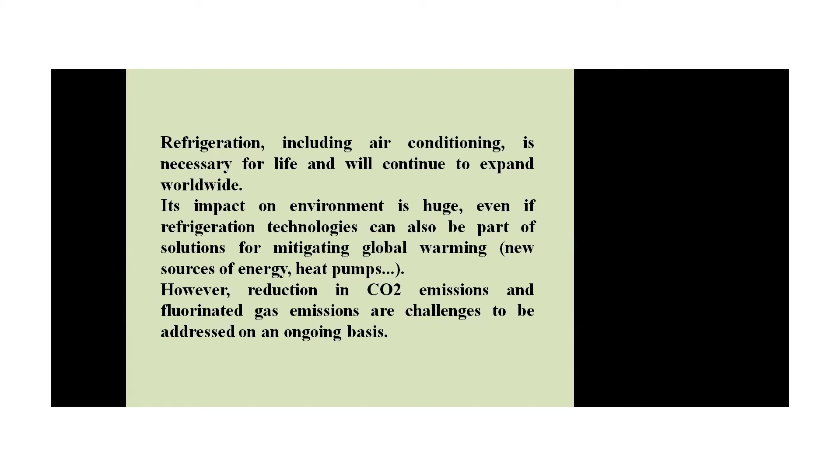Now, refrigeration is necessary for mankind, as temperature is a magnitude and a key variable in physics, chemistry, and biology, and characterizes the states of matter - liquids, solids, gaseous phase - which is vital for all living beings. And thanks to our research and development for almost 200 years, refrigeration technologies have progressively led to the providing of good and vital services to mankind.

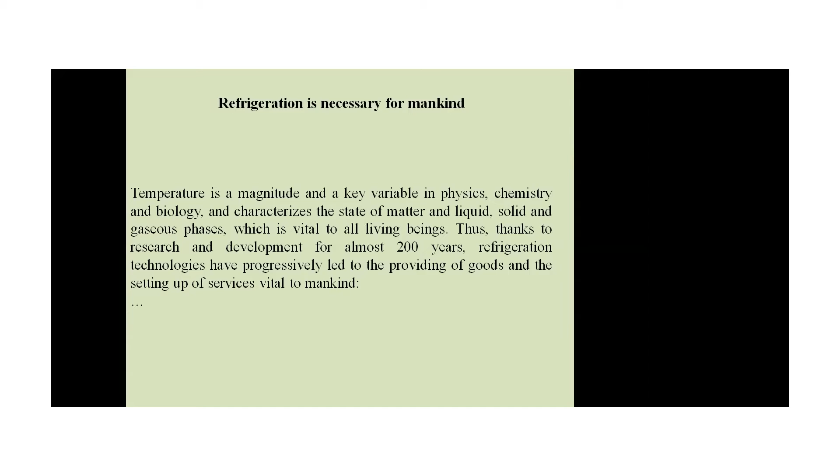Cryogenics means the sectors where we are using refrigeration: air separation for medical uses, cryosurgery, anesthesia, petrochemical refining, steel production, space propulsion, fuels, medical applications, transport and distribution of natural gases or hydrogen, manufacturing of semiconductors, sequestration of carbon dioxide, conservation of species, etc.

Other major health issues where refrigeration plays an important role are the preservation of cells, tissues, organs, embryos, surgery and operating theaters, and manufacturing and transport of drugs and vaccines.

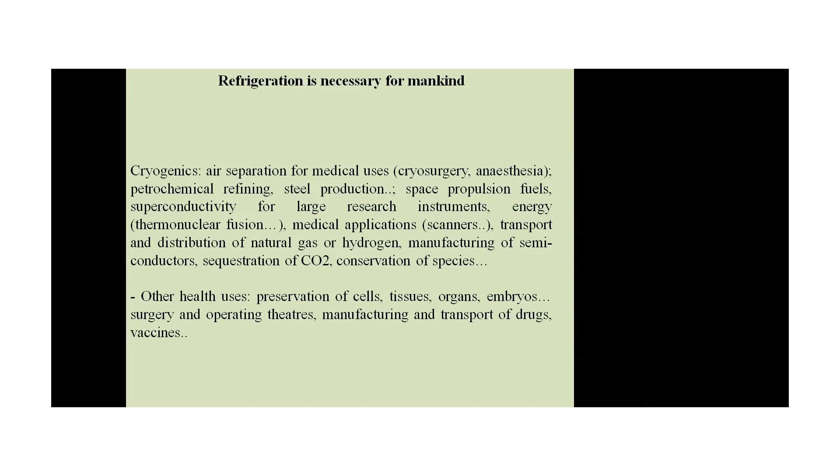Without transportation, the economy of a nation cannot grow, so in the transport sector refrigeration also plays an important role. Take for example air conditioning, vehicles, living areas, integrated systems, heating and cooling with heat pumps, offices and factories, particularly in hot climates, but also technologies like electronic components, computer technology, data centers, and biotechnology.

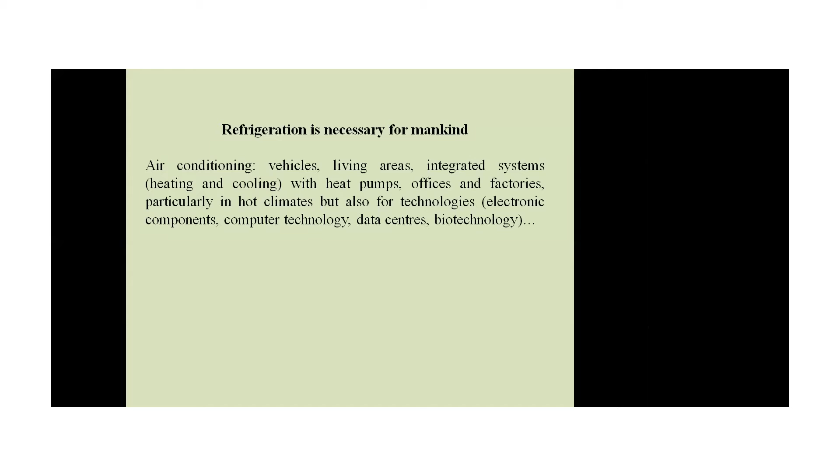Many of the programs have been going on online, so most of these devices and systems are being placed in areas where air conditioning is available, so that these systems can work at the greatest efficiency.

As far as food is concerned, the basic need of human nature is food, clothing, and shelter - in Hindi we call it roti, kapda, and makan. So food is also an important sector where refrigeration plays an important role.

In food, refrigeration is used in manufacturing, texturation, formulation, freeze-drying, fermentation, concentration, and separation. Storage and transport - for example, we are supplying milk from one place to another - and for commercialization purposes we are also using it.

Domestic refrigerators are the refrigerators that we use at our home to prevent food from spoiling.

As far as energy and environment applications are concerned: cryopreservation of genetic resources, capture and underground storage of carbon dioxide, heat pumps, and new energies.

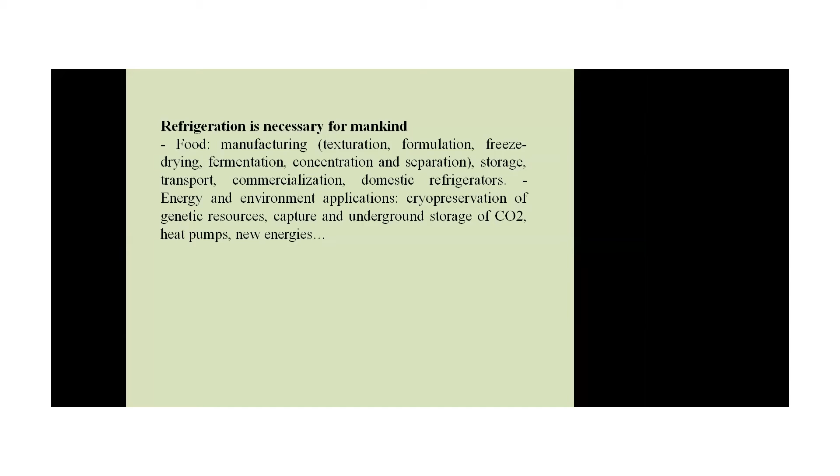As far as the impact of refrigeration and air conditioning on the environment is concerned, on the stratospheric ozone layer, more than 90% of refrigeration equipment relies on vapor compression using refrigerants, and that is not likely to change in the near future.

Chlorinated refrigerants, for example chlorofluorocarbons, and to a lesser extent hydrochlorofluorocarbons, contribute to the depletion of the stratospheric ozone layer if released into the atmosphere due to equipment leakage, or if refrigerants are not properly recovered when disposal of the equipment takes place.

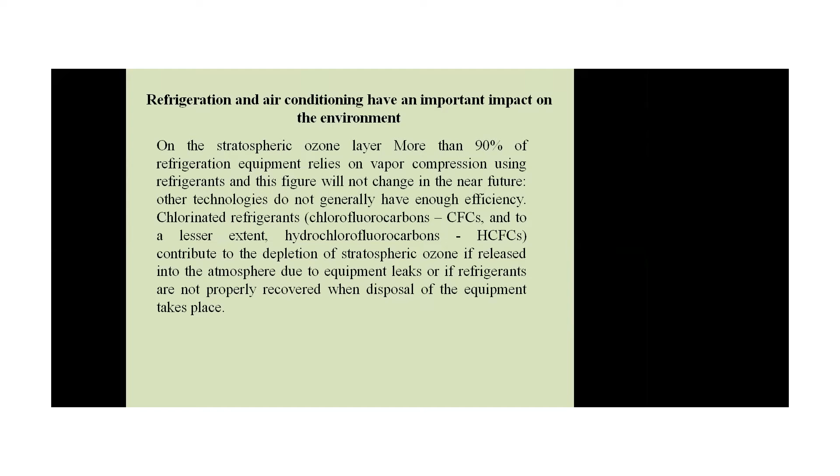So this is about leakage. If a refrigerant is released into the atmosphere, the heat generated while all these cycles are being performed is also one of the concerns in increasing global warming.

CFCs and HCFCs are gradually being phased out thanks to the Montreal Protocol. These protocols are nothing but regular meetings of all the nations, which are continuing on a regular basis.

Take for example, you might have also heard of the Kyoto Protocol, being followed since the 1990s onwards. Kyoto is a city in Japan, and protocol means the treaties and legislative documents that have been signed for the protection of the environment.

Current measures of the ozone layer show overall stability and probable recovery of previous levels around 2060. Ozone-depleting substances are often replaced by hydrofluorocarbons, which do not deplete the ozone layer but are potent greenhouse gases, as are HCFCs. When released into the atmosphere, chlorofluorocarbons were also greenhouse gases, and their global warming potential was much higher.

The impact of the Montreal Protocol is thus also positive regarding global warming. The Montreal Protocol has led to great progress in phasing out important ozone-depleting substances, including CFCs, HCFCs, halons, and a number of other chemicals containing chlorine and bromine.

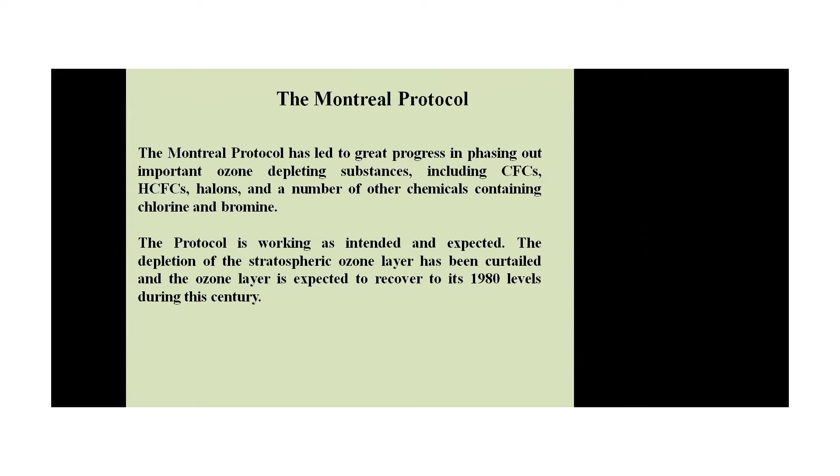The whole world is committed, as you might have heard about 2DC - the 2 degree centigrade program. We are trying to prohibit the temperature rise, stop global warming, and reduce temperatures so that the overall temperature of the earth does not increase by 2 degrees centigrade by the end of this century, because if such a thing happens, most of us will be in the biggest of troubles.

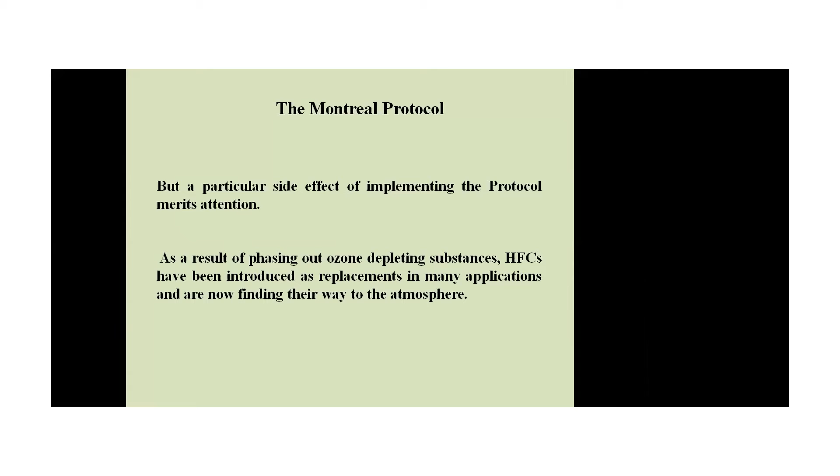The HFCs vary significantly in their ability to influence climate, whereas some have low global warming potentials of less than 20, others are potent greenhouse gases with global warming potentials of thousands to tens of thousands. Given that the global warming potential of the current mix of hydrofluorocarbons is about 1600, there is concern that HFCs will significantly influence climate in future if they continue to increase.

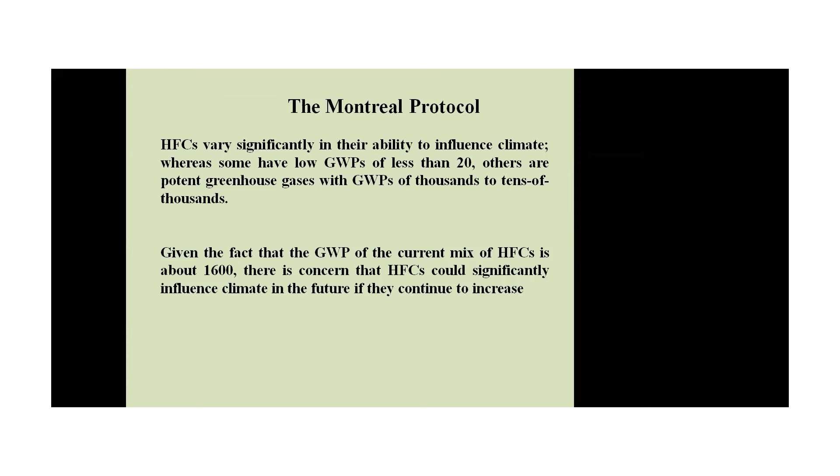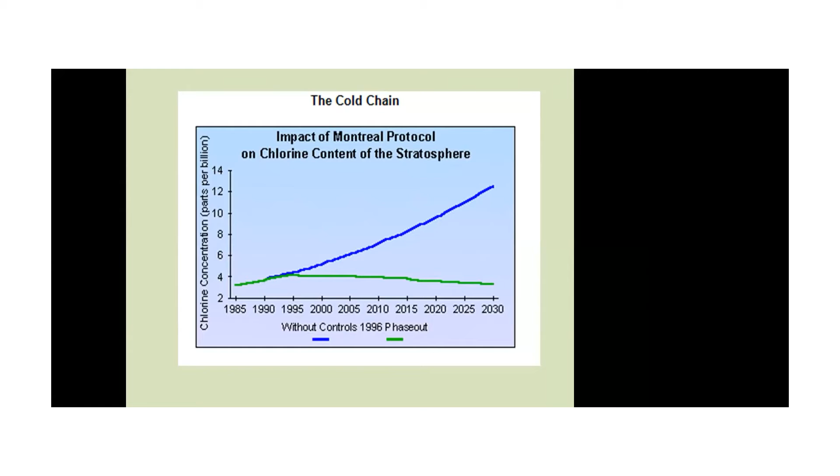So this is the graph which shows the chlorine content of the atmosphere if it just goes out of control. You can see the blue line reaching about 12 parts per billion by the end of 2030. If this particular phase out is carried out, it may be curtailed down, which will be very helpful for us.

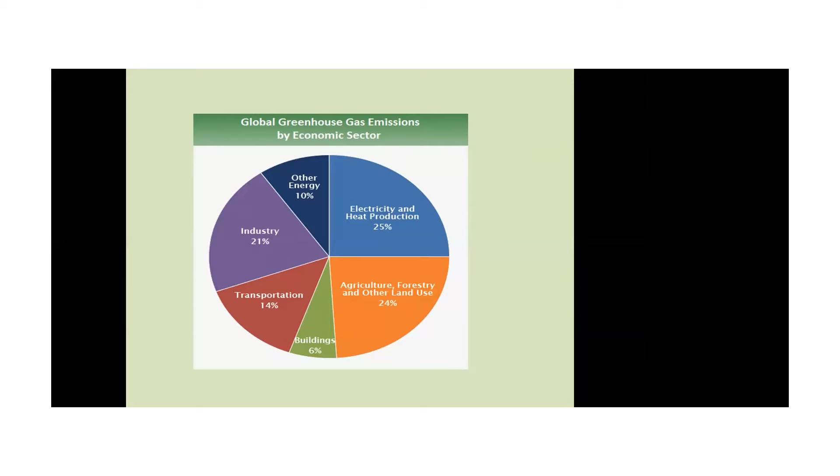Now, as far as global greenhouse gas emissions are concerned by the various economic sectors, these are the sectors that we generally relate to, and we need all these sectors for our economic growth. Take for example electricity and heat production, agriculture, forestry and other land uses, buildings, transportation, industry, and other energy. I think refrigerant plays an important role in every aspect of this particular figure being shown.

This is about the whole global status or standard. The energy used in industries is around 24.2%. This energy used in industry comprises iron and steel, chemicals and petrochemicals, food and tobacco, paper and pulp, machinery, and other industries.

As far as transport is concerned, the transport sector comprises road transport, aviation, and shipping. This almost leads to 16.2%.

Now coming to the residential sector. Residential sector means energy used in buildings, which is growing up to 17.5% in its present status. Commercially it is 6.6%, and residential purpose buildings are 10.9%.

And we have unallocated sectors remaining, that is agriculture and forestry also using energy, and these are the contributions being made by all the sectors at present.

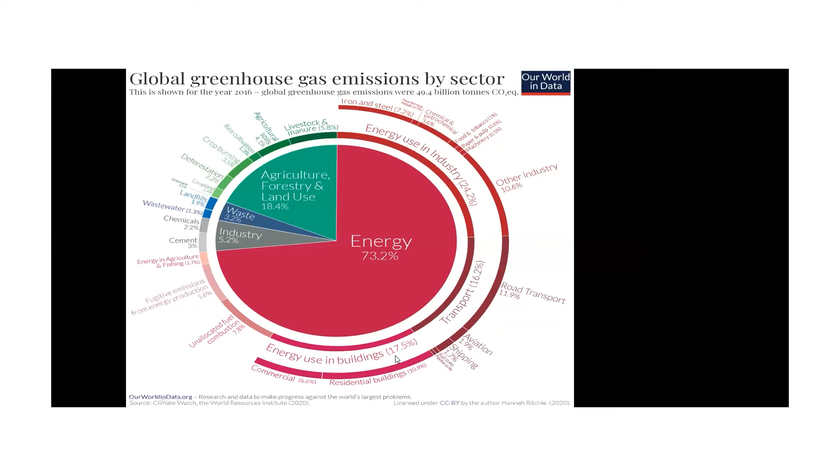So these are some direct fluorinated gas emissions. These direct emissions have been reduced considerably since 1987. However, we need to act in order to avoid a new increase, that is setup of reliable fluorinated refrigerant recovery across the world, scrapping of equipments, reducing leakage through design, proper maintenance, training, and certification of technicians and plants.

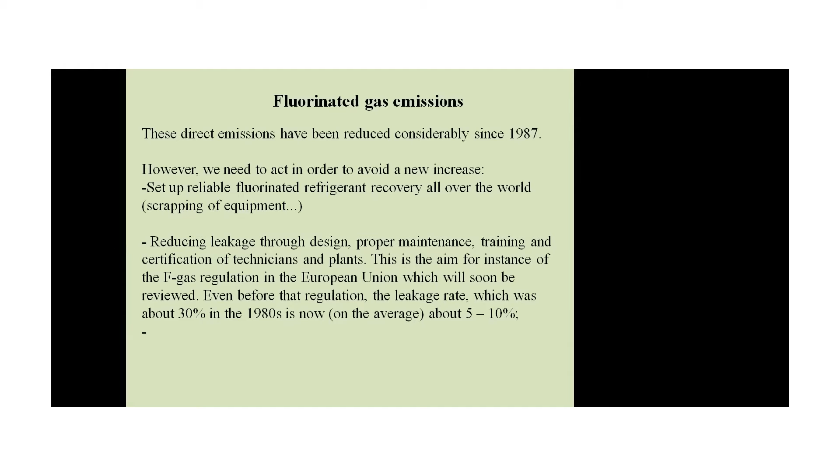This is, for instance, the F-gas fluorine gas regulation in the European Union, which will soon be reviewed. Even before the regulation, the leakage rate, which was about 30% in the 1980s, now averages about 5 to 10%.

Reducing refrigerant charge, that is secondary loops, microchannel technology, and heat exchangers, thus reduces the refrigerant emissions per refrigeration unit with the same capacity. It is also a solution which avoids safety problems when using low global warming potential refrigerants.

Promotion of low global warming potential refrigerants, especially natural refrigerants - ammonia, carbon dioxide, hydrocarbon, and water - which already enable efficient solutions to be developed for most applications. Even if technical solutions were often initially developed in developed countries and in cold climates, applications also exist in China, India, and Australia.

Taxing or banning of certain high global warming potential refrigerants in certain applications, that is mobile air conditioning regulation in Europe or taxes in certain European countries, promoting alternative solutions.

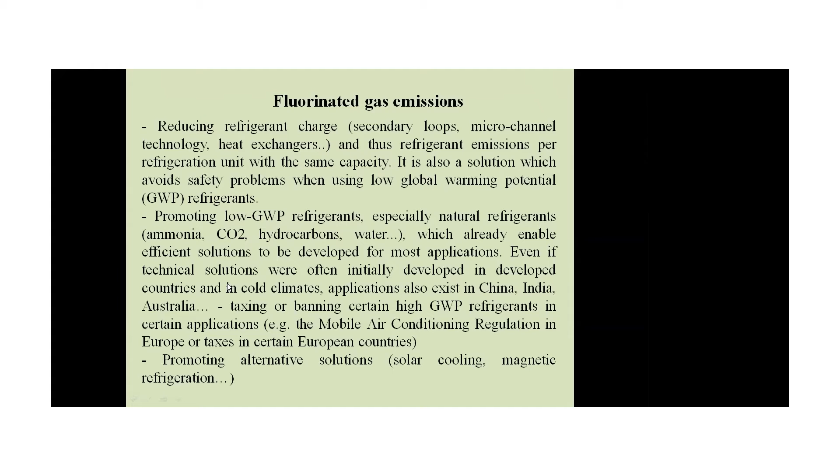As my colleagues, those who have been using four-wheelers, might have seen, every 10 years there is some change in the refrigerant. Some new technology is being incorporated, which is beneficial for us as well as for the environment.

The coefficient of performance of refrigeration systems has already been improved. For instance, in commercial refrigeration it was about 2.5 in 1960, and it is now about 4. New refrigerators used 4 times less energy in 2008.

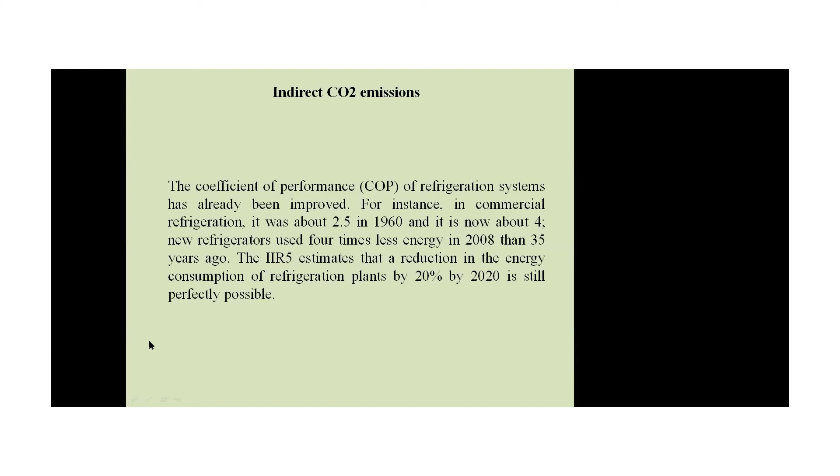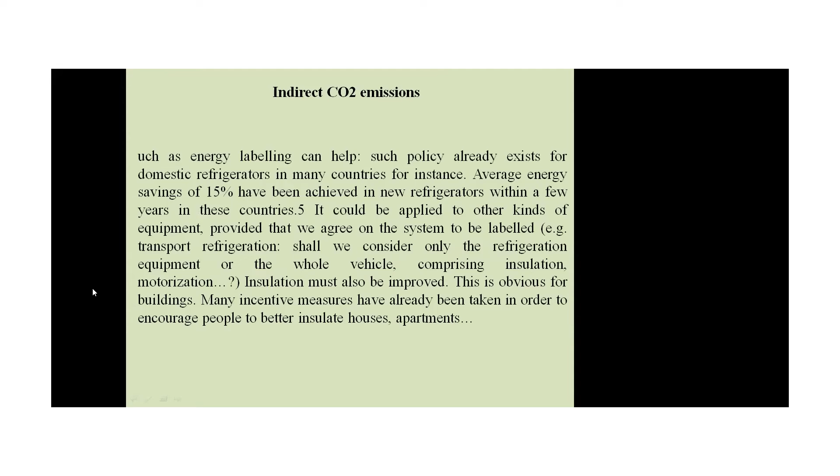These are some factors which may help us in lowering emissions. Energy labeling can help. Such policies already exist for domestic refrigerators in many countries. For instance, average energy savings of 15% have been achieved in new refrigerators.

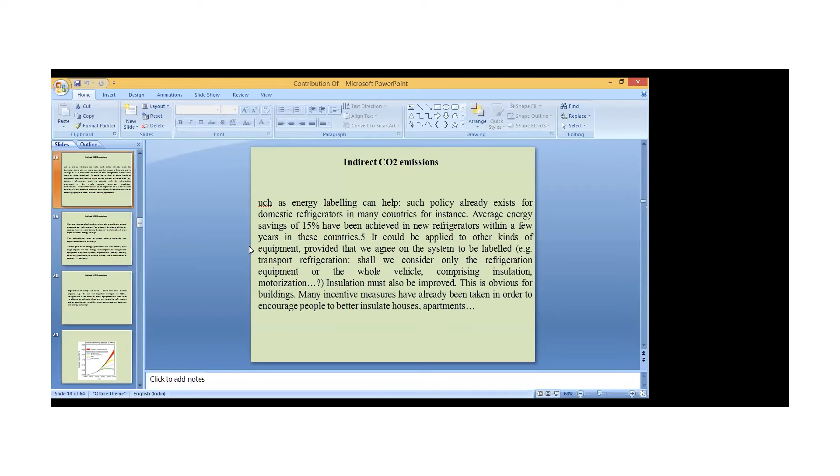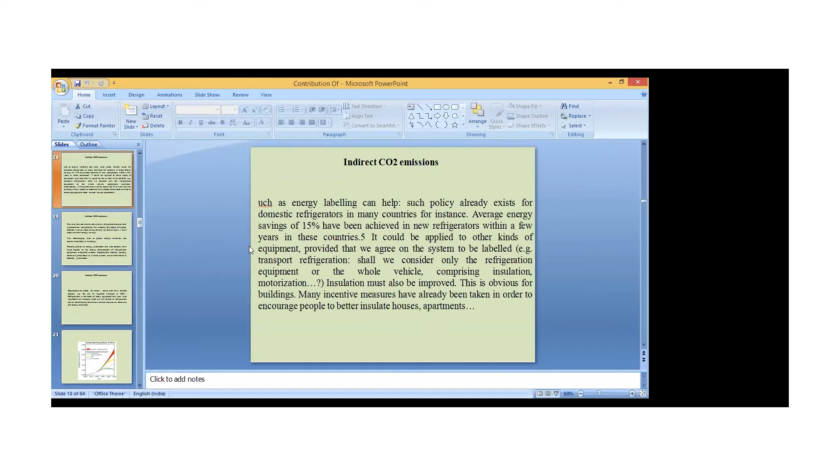Now, talking about the indirect carbon dioxide emissions - in the slide you can see transport refrigeration should be considered not only for the refrigeration equipment but the whole vehicle, comprising insulation and motorization. Insulation must also be improved. This is obvious for buildings too; many incentive measures have already been taken in order to encourage people to better insulate houses and apartments.

However, this can also be achieved in refrigerated transport and in commercial refrigeration. For instance, the design of display cabinets that are open during the day and covered at night is a major source of energy savings. New technologies such as phase change material can improve insulation in buildings.

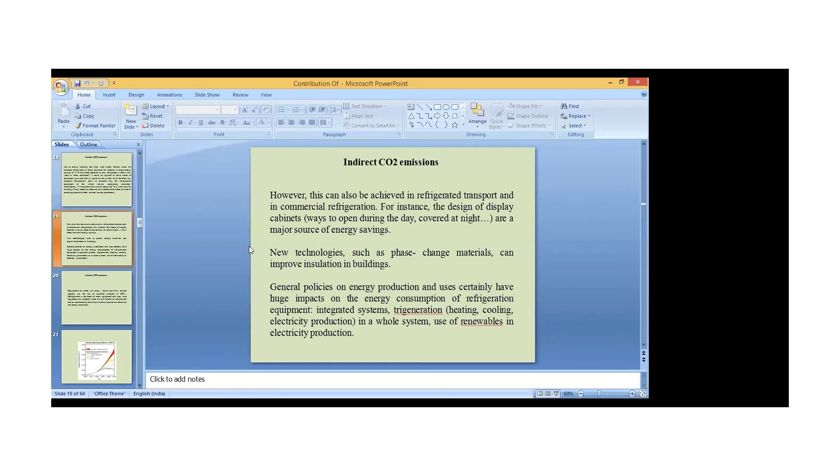General policies on energy production and use certainly have huge impacts on energy consumption of refrigeration equipment, integrated systems, trigeneration, heating, cooling, and electricity production in a whole system, and the use of renewables in electricity production. Regulations on safety or noise could also have indirect impacts. The use of liquefied nitrogen or carbon dioxide refrigeration is at the heart of many equipments, and even regulations on subjects not related to refrigeration and air conditioning could have indirect impacts on electricity and energy consumption.

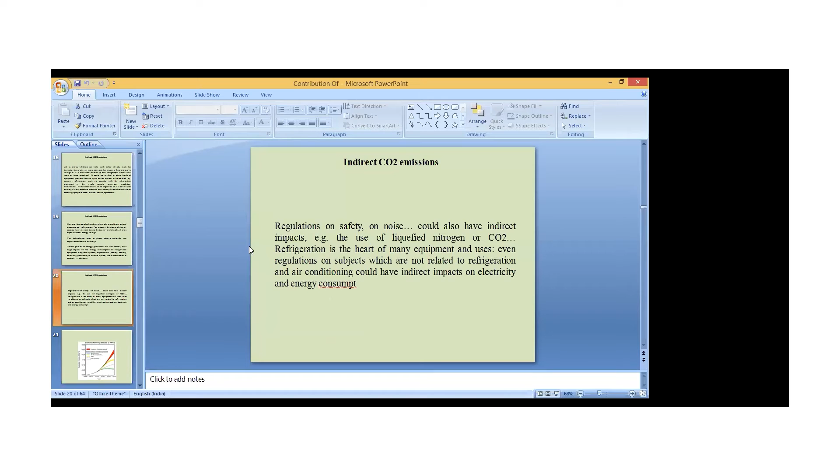So this is the climate warming effect of using hydrofluorocarbons. It means if hydrofluorocarbons have been constantly used, then this is the scenario that we are going to obtain. The baseline is the red area being shown, and per the Montreal Protocol amendment proposals, if India follows them, they will be reaching up to that standard.

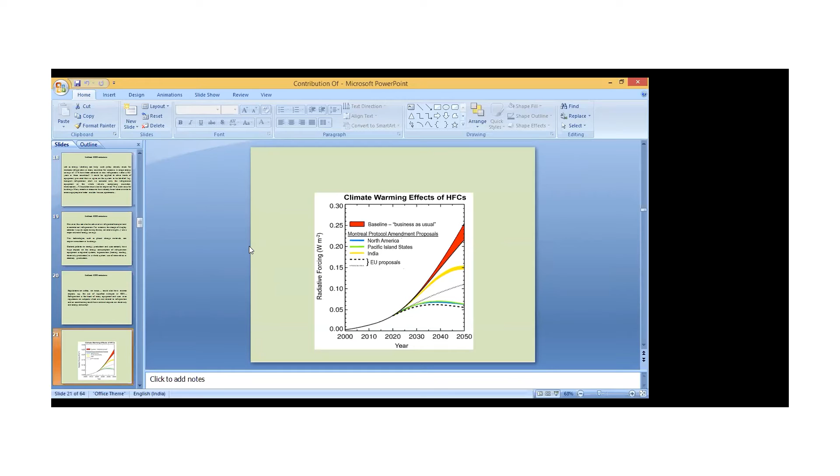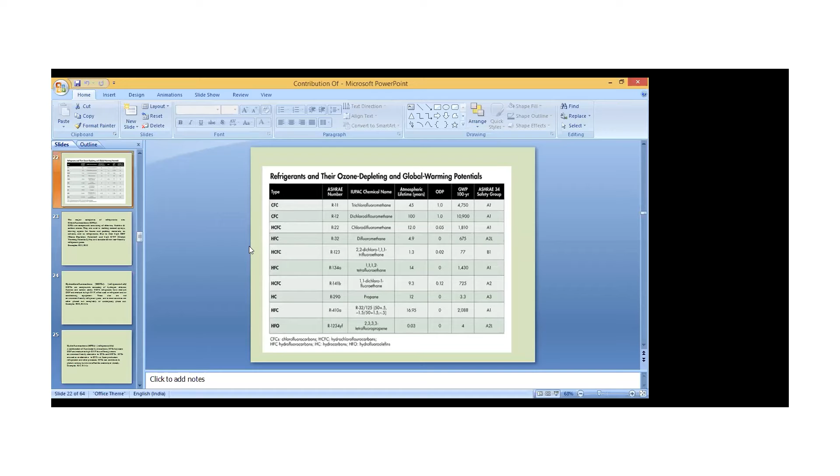So these are the various things that we are doing. Now, as far as refrigerants and their ozone depleting and global warming potential are concerned, this slide shows the chlorofluorocarbons and their numbers stated against them, along with their IUPAC chemical names. Their atmospheric lifetime in years and their global warming potential over 100 years are also mentioned in this slide. So now, the major categories of refrigerants being used, after coming so far.

Chlorofluorocarbons are compounds consisting of fluorine and carbon atoms. They are used in making aerosol sprays, blowing agents for foam and packaging materials, as solvents, and as refrigerants due to their ODP, that is ozone depletion potential, and high global warming potential. They are considered non-eco-friendly refrigerant gases. Examples cited are refrigerant 11 and 12.

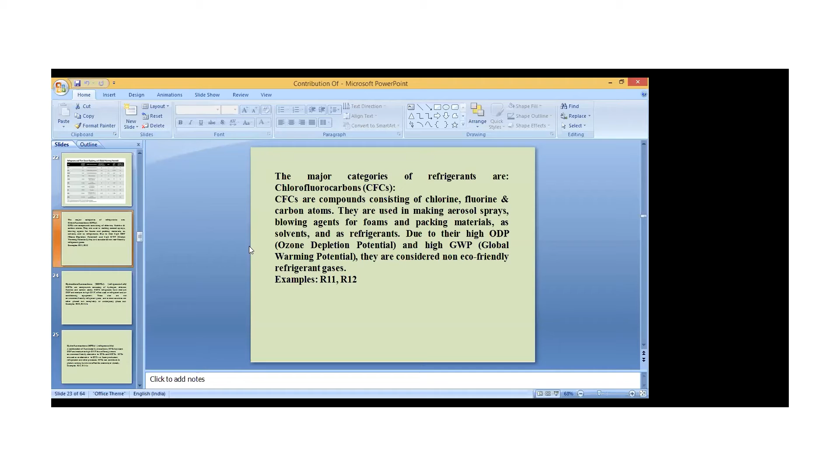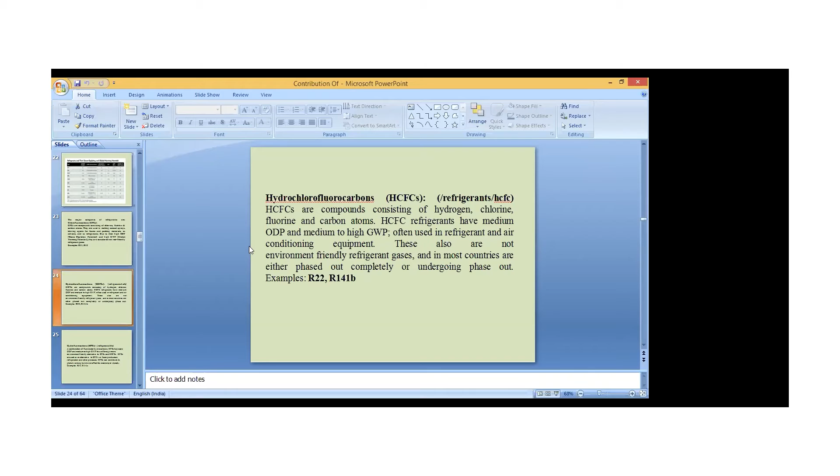This is about hydrochlorofluorocarbons. Hydrochlorofluorocarbons are compounds consisting of hydrogen, chlorine, fluorine, and carbon atoms. HCFC refrigerants have medium ozone depletion potential and medium to high global warming potential. They are often used in refrigeration and air conditioning equipment. These are also not environment-friendly refrigerant gases, and in most countries are either completely phased out or undergoing phase-out. These are the examples - the refrigerants that are being stopped or are no longer being used.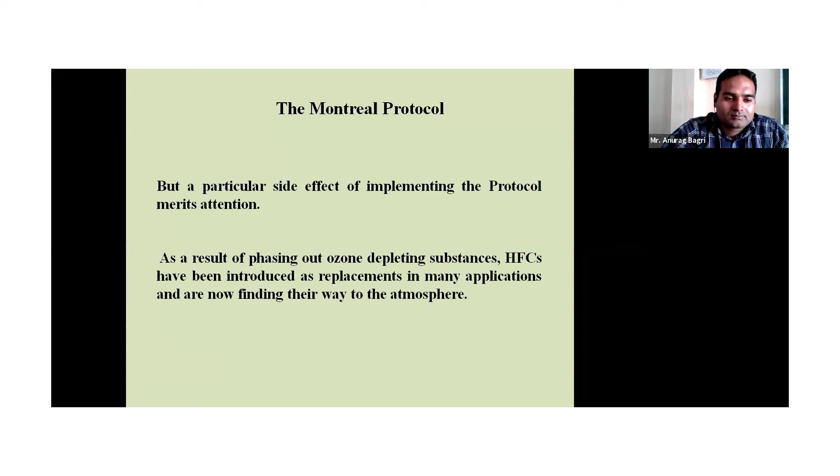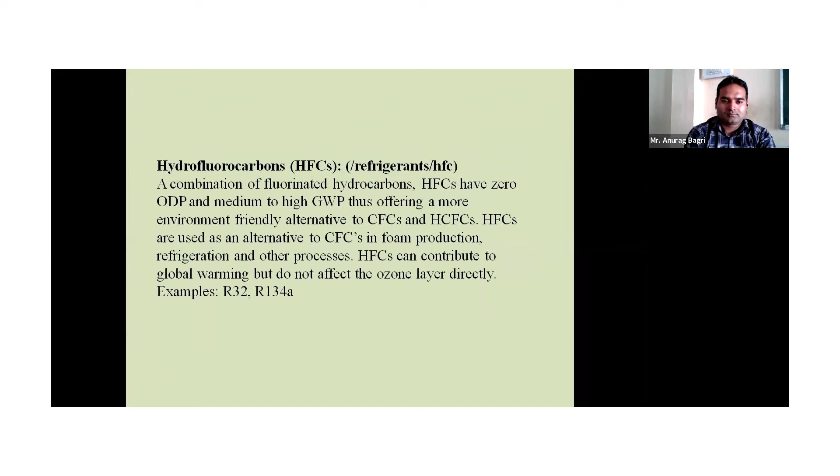So here we work with hydrofluorocarbons, a combination of fluorinated hydrocarbons, which have zero ozone depletion potential and medium to high global warming potential, thus offering a more environment-friendly alternative to chlorofluorocarbons. HFCs can contribute to global warming but do not affect the ozone layer directly. These are the examples of some refrigerants, that is R32 and R134a.

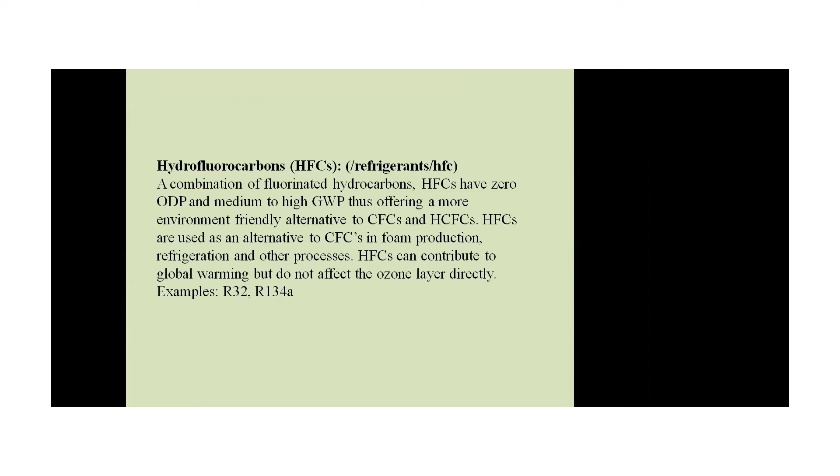Now, hydrofluoroolefins comprise hydrogen, fluorine, and carbon atoms connected by a single bond between the atoms. HFO refrigerants have zero ozone depletion potential and comparatively very low global warming potential, and are currently considered the most eco-friendly refrigerants available. So now these are replacing the HCFCs.

CFCs, HCFCs and HFCs are chemically synthesized. They do not exist as a compound naturally, and as their medium to high ozone depletion potential and global warming potential is considerably detrimental to the environment, they are being phased out under the Montreal Protocol of 1987.

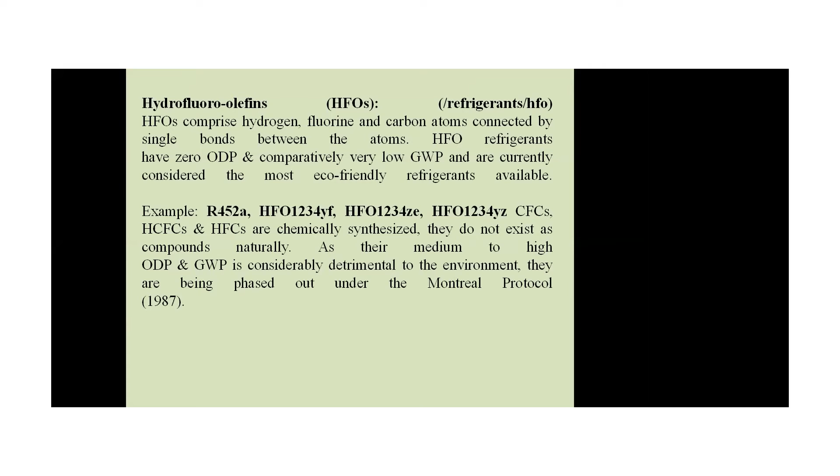HFOs are synthetically made, unsaturated, with no ozone depletion potential and low global warming potential, resulting in the lowest adverse effect on the environment, making them eco-friendly refrigerant gases. Natural refrigerants have zero ODP and extremely low global warming potential, making them ideal replacements for CFCs. There are naturally occurring substances like CO2, ammonia, water, and air. They can also be hydrocarbons such as propane, isobutane, butene, propene, and propylene.

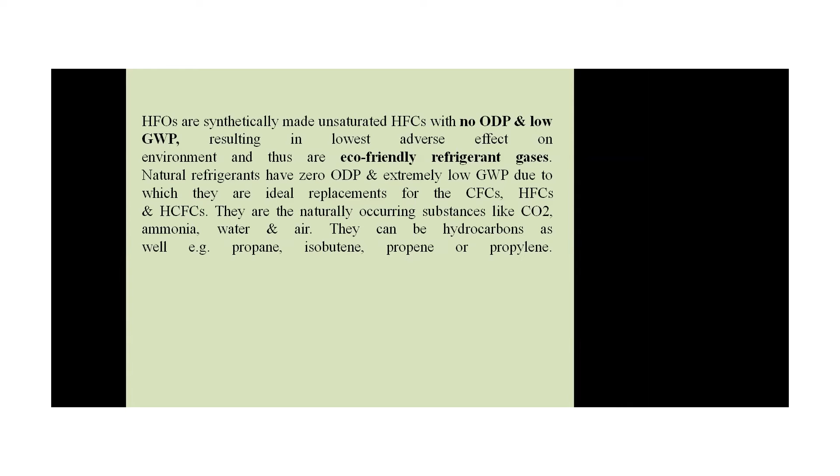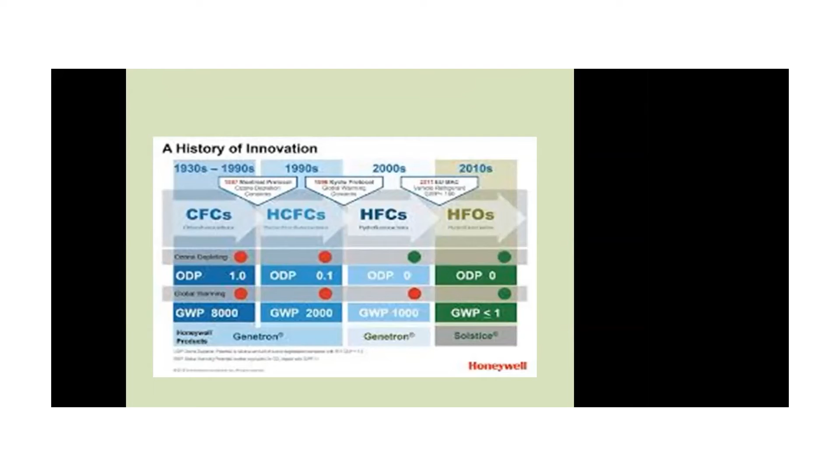So this is about the changes, or the eras in which we have been using particular refrigerants. Chlorofluorocarbons were used from the 1930s to the 1990s. In the 1990s, HCFCs came, and after that, in 2000, HFCs came. Now HFOs are being used. So these are their ozone depletion potential and global warming potentials.

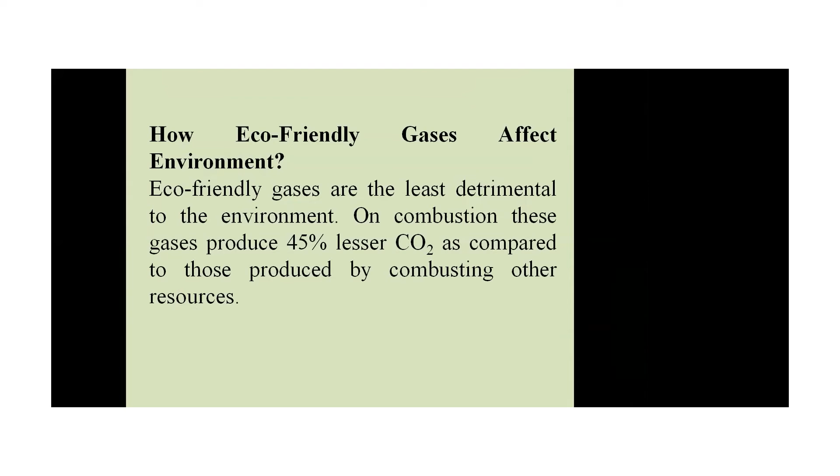So how can eco-friendly gases affect the environment? Eco-friendly gases are the least detrimental to the environment. On combustion, these gases produce 45% lesser carbon dioxide compared to those produced by combusting other resources. Benefits of eco-friendly gases include recycling or disposal after usage in a cooling system being comparatively easier than with CFCs, HCFCs, and HFCs. These gases are typically more energy efficient than fluorinated gases.

Eco-friendly gases can be used in almost all refrigeration and air conditioning applications. These refrigerants are not patented by the chemical industry and are cheaper than HCFCs. These gases do not harm the environment and can be handled safely with care. They can be obtained as byproducts from other processes, and it is easier to make them readily available if proper distribution structures can be established.

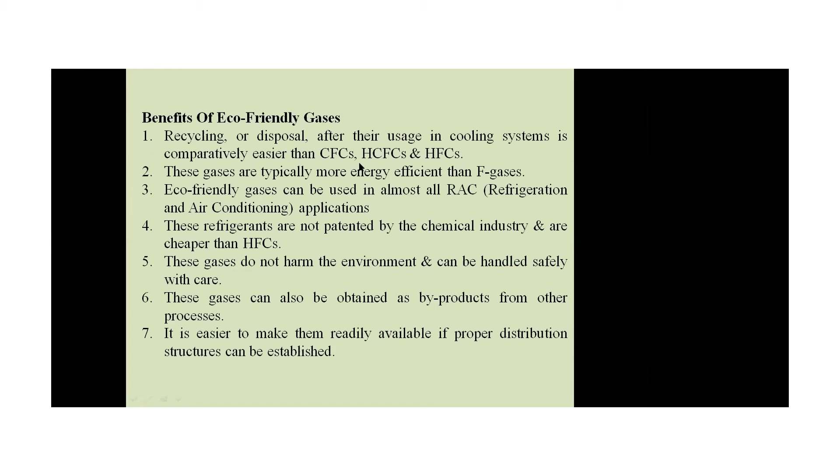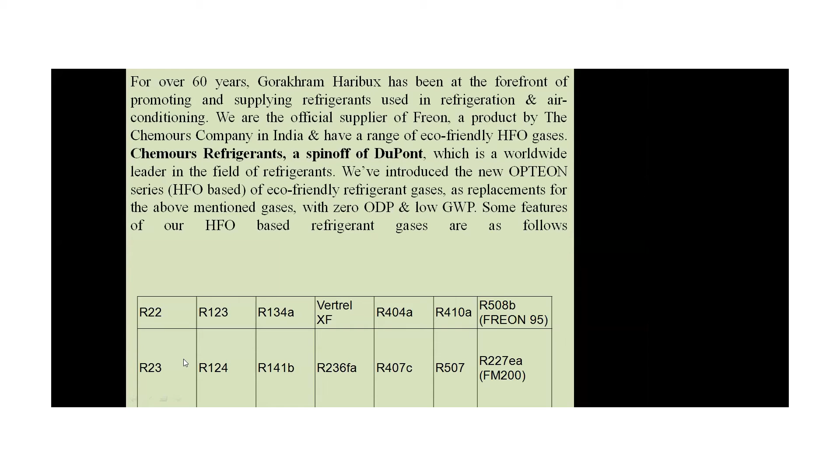So this is an example of a foreign agency working in collaboration with Chemours refrigerants, and they have been using these zero ODP and low global warming potential gases. These are some gases that are being used.

Now, as far as refrigerants with a low global warming potential, this is Opteon, HFO 1234YF. It has a low global warming potential gas that can replace existing HFC 134A automotive air conditioning systems with minimal retrofitting. It has improved performance and lower indirect contribution to climate change versus HFC. Therefore, they are being used in this transport system.

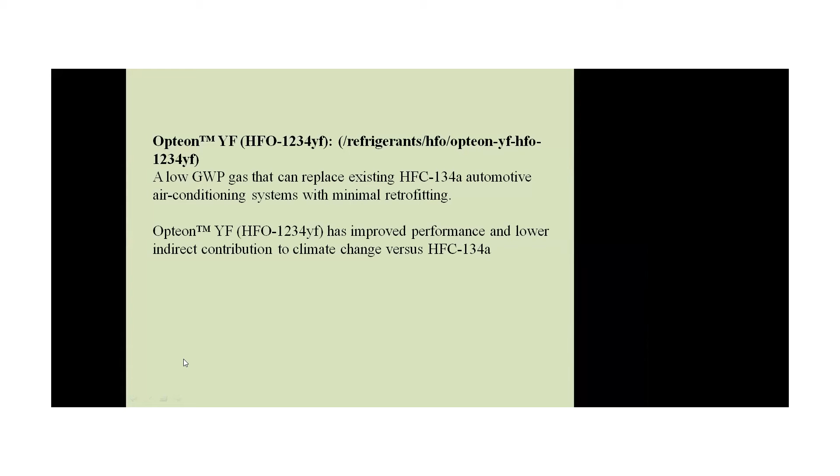Now this is another example of a refrigerant. It is non-ozone depleting, with low global warming potential. This HFO is a replacement for R404A and R507 in new equipment and retrofits of existing systems. It offers a near match to the compressor discharge temperature and mass flow rate of R404A and R507, eliminating the need for TXV adjustment, and is suitable for commercial refrigeration and chillers. Its other features include a low global warming potential, 51% reduction compared to R404A and R507, and it is approved and adopted by major equipment manufacturers.

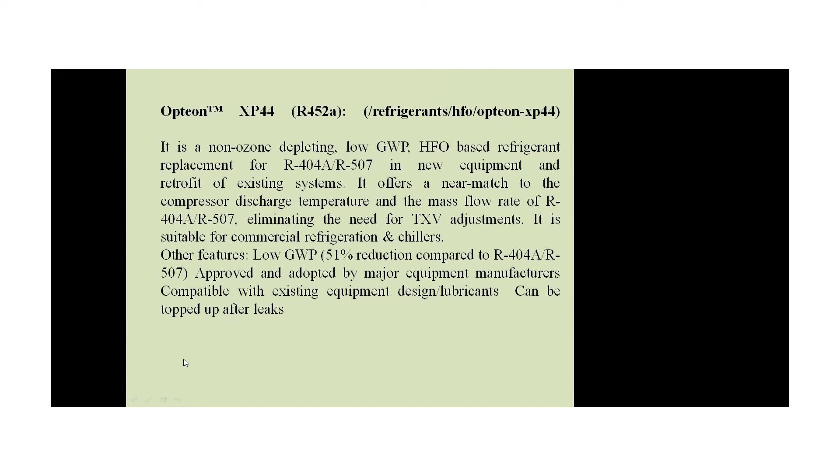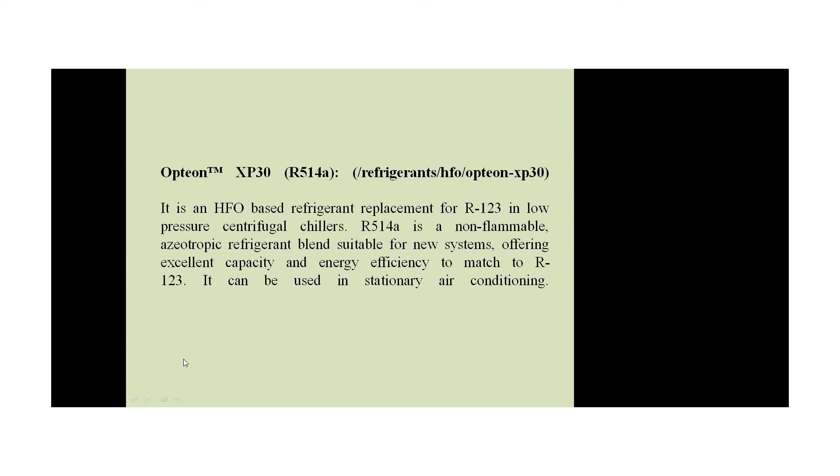This is another HFO refrigerant that is being used as a replacement for R123 in low pressure centrifugal chillers. R514A is a non-flammable azeotropic refrigerant blend suitable for new systems, offering excellent capacity and energy efficiency to match R123. It can be used in stationary air conditioning.

This is another refrigerant, an azeotropic refrigerant suitable for new and retrofit of existing systems, offering excellent capacity and energy efficiency matched to R134A. Its other features, as you can see, include a low global warming potential, 56% reduction compared to R134.

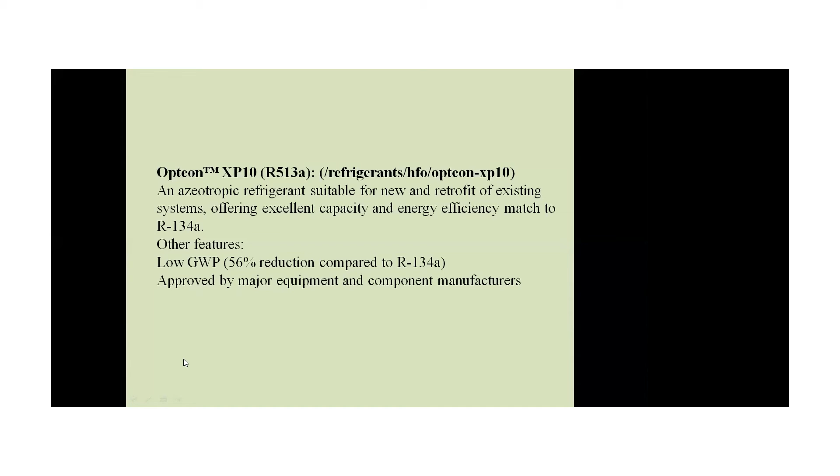This is another refrigerant being used. So these are the refrigerants that we have been using as an alternative.

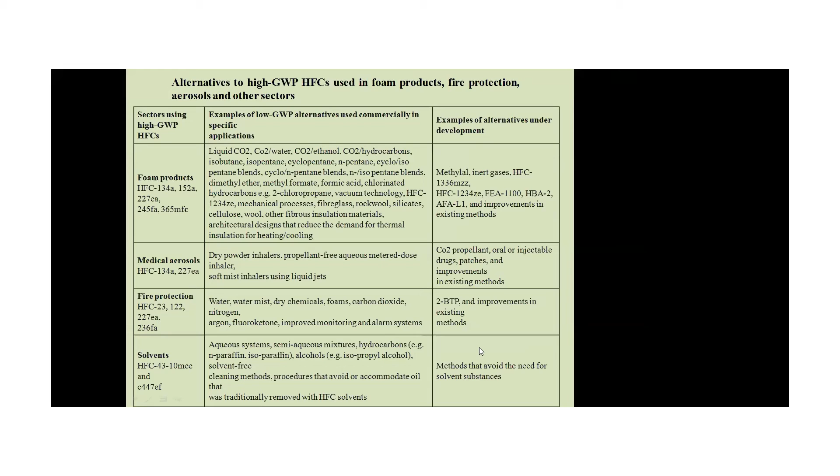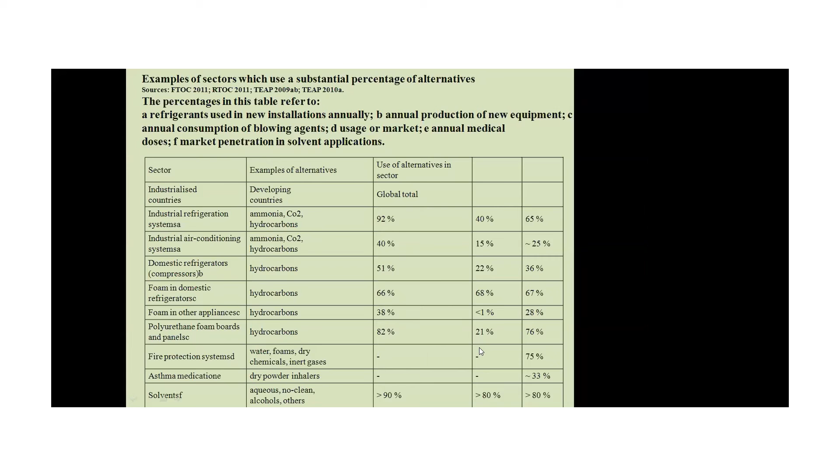Now, alternatives for refrigerators: about 104 million domestic refrigerators and freezers are produced annually. Each unit contains 20 to 250 grams of HFC refrigerant and up to 1 kg of HFC blowing agent in the insulating foams. When CFCs were being phased out in the 1990s, hydrocarbon technology was developed for domestic refrigerators to produce low global warming potential alternatives to ODCs, ODSs, and HFCs. The use of hydrocarbons has grown to about 36% of the global market, and is expected to reach about 75%.

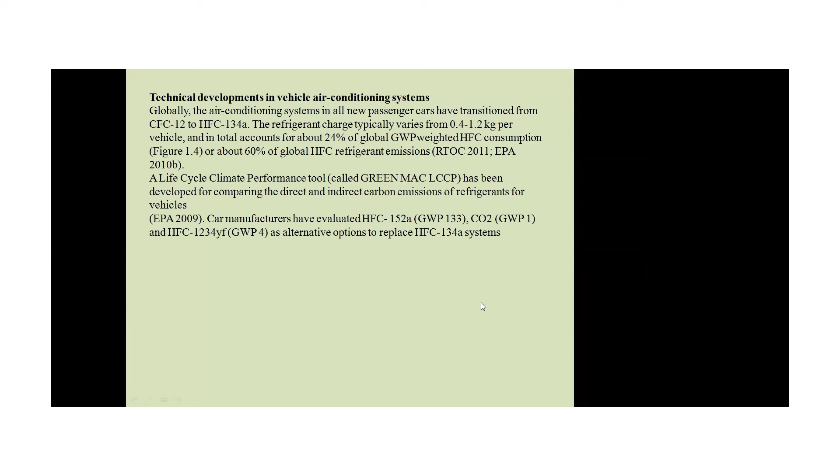A life cycle climate performance tool has been developed for comparing the direct and indirect carbon emissions of refrigerants for vehicles. This is how the production of refrigerants has been in the past.

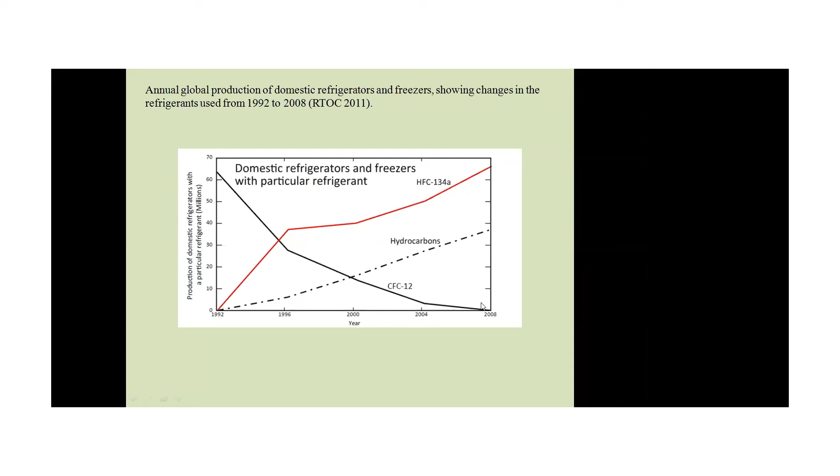So consumer goods manufacturers and retailers have pledged to begin phasing out HFC refrigerants in 2015, and it is because of the technology transformation that takes place.

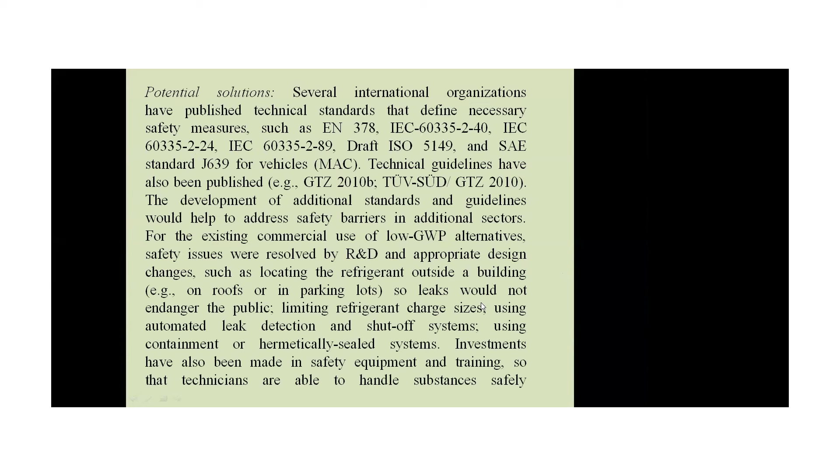And this is about energy consumption and life cycle carbon emission issues. At present, the thermal performance of alternative foam systems is lower than that of typical HFC systems in some applications. The energy efficiency of alternative refrigeration in certain applications is not as high as conventional HFC systems.

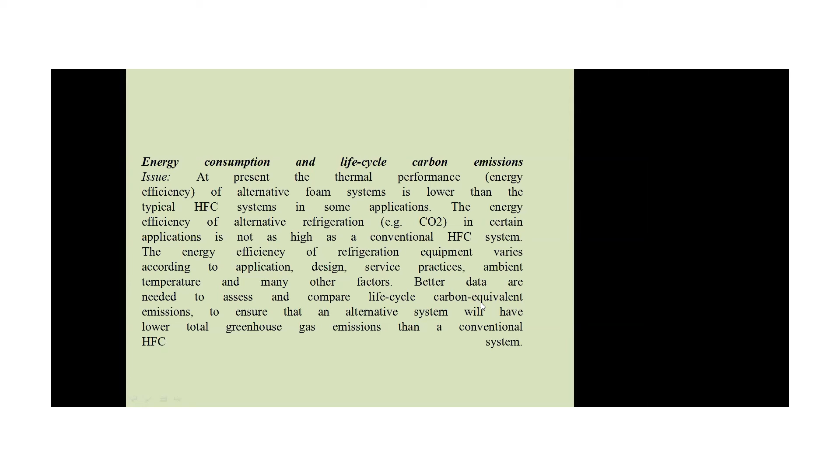So these are some potentials that have been cited, and these are issues. And this is about the trigeneration principle, meaning fuel you are using is 100%, heat loss is 13%, electricity 30%, heat release is 55%, and after that they are providing you cooling.

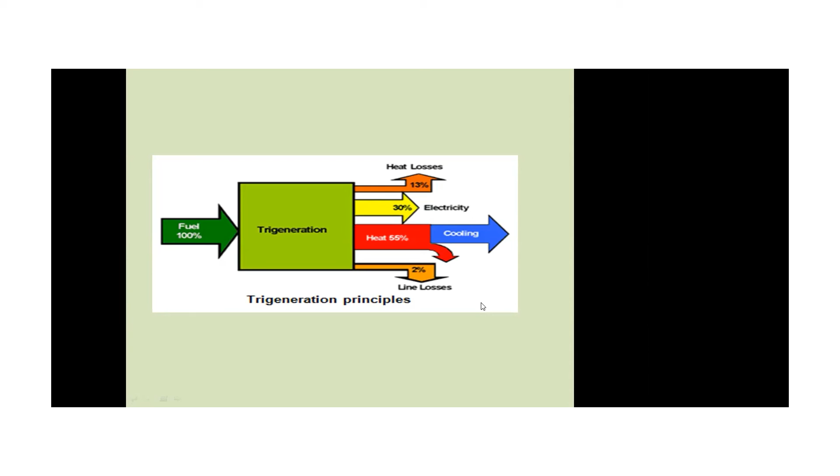And this is the conclusion. Refrigeration equipment must be adapted to the global warming challenges. It needs a long-term potential. The current phase-out of HCFCs, even if it requires huge efforts on the part of the refrigeration sectors, provides an opportunity to design new equipment using renewable energy sources and technologies with good energy efficiency.

And these are some references that I have cited from where I have collected all this data. So here I just finish up with this conclusion.